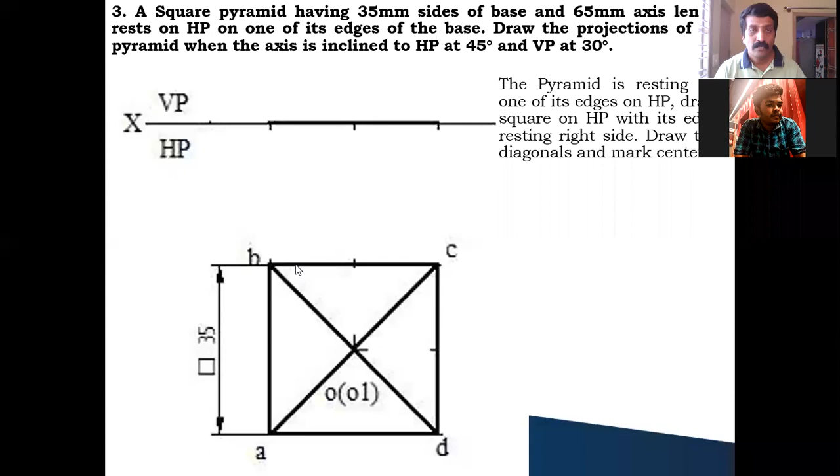Next, coming to the front view, you draw the vertical projectors from all the points like this. Already we have done this in the first example. Draw the vertical projectors, and from the center you take 65 millimeter. This is the axis of your square pyramid. Mark it on that. You call that O dash.

From here you draw a line to the end points, and you are looking from the front side. A and D points you can see, you cannot see B and C. That's why B dash and C dash should be written within brackets. And O1 point is the base point. Even in the front view or top view, you cannot see that. So it is written within brackets. So this completes your true shape diagram, that is front view and top view.

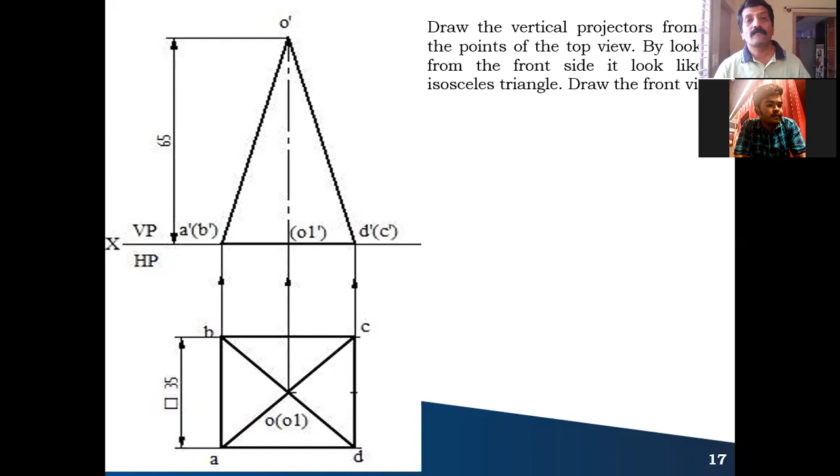Next, coming to the next step, he has given the axis of the pyramid is inclined at 45 degree to HP. In the last class, the same thing we have discussed. The base and the axis of the pyramid are mutually perpendicular to each other. So this is your axis. Axis is making an angle of 45 degree, so since the base and axis are mutually perpendicular, the base also should have 45 degree.

So what I will do, I'll take right side on the XY line A1 point and I'll draw a 45 degree line, that is base inclination, left side like this. After drawing this base inclination, I'll redraw the previous front view such that this isosceles triangle base should exactly rest on this 45 degree line. So without changing its shape and size and all the points, I need to redraw it.

Okay, how to redraw it? First you are taking this D dash and C dash point here. You take the base as your length, that is 35 millimeter. With this as the center, you cut this 45 degree line. And you call the corresponding points A dash and B dash, and take from here to any one center point, and from here you cut it, you will get the O1 point also.

And from this O1, you draw a 90 degree line, or perpendicular line, to this base. On this perpendicular line, you take 65 millimeter as the axis length and cut it here. So you'll get O dash also. After getting all the points, you join it. So you're going to get the isosceles triangle, and the base is inclined at 45 degree.

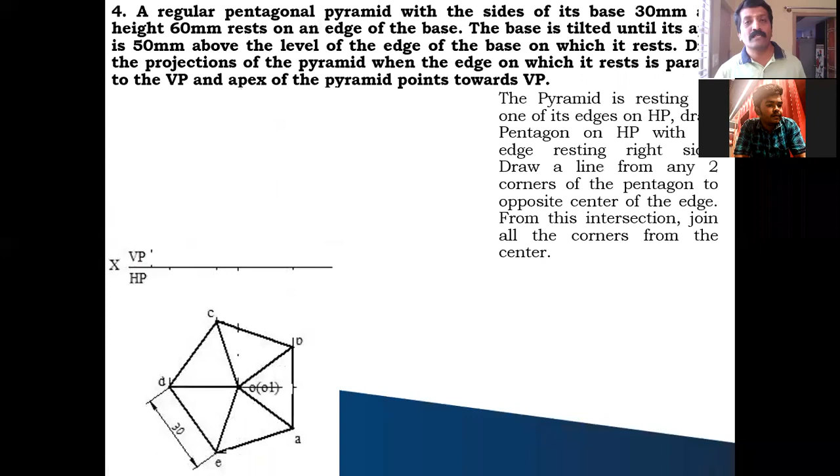Next, what has he given? The question clearly says the base is tilted until its apex is 50 millimeter above the level of the edge of the base. So it is like this. You have taken the edge on your right side. The apex is tilted such that from the base it should be 50 millimeter distance. This distance is 50 millimeter.

So this is the initial position. The apex is tilted in such a way that the perpendicular distance between the apex and the base is 50 millimeter. How do you draw this? Let me explain on the next slide. Observe the cursor. You take 50 millimeter above the xy line and draw one horizontal line. That means your apex point should come on this particular 50 millimeter line.

After that, I will take any one point on the right side here, because it is resting on the base, and I will call this edge A dash B dash. Then I will take the distance from A dash to O dash, with this as the center, and cut this 50 millimeter line. I'll call it O dash, because this is the apex which has to be tilted so that it is 50 millimeter above the base. So I got the A dash B dash point as well as the O dash point.

Now I need to get this point. How to get this? Take the distance from A dash to D dash and cut an arc somewhere here. Similarly, take the O dash to D dash length with the help of your compass. With this as the center, you cut this arc. Wherever these two arcs intersect, from that point you join it to A dash as well as O dash. Then this outer triangle is ready.

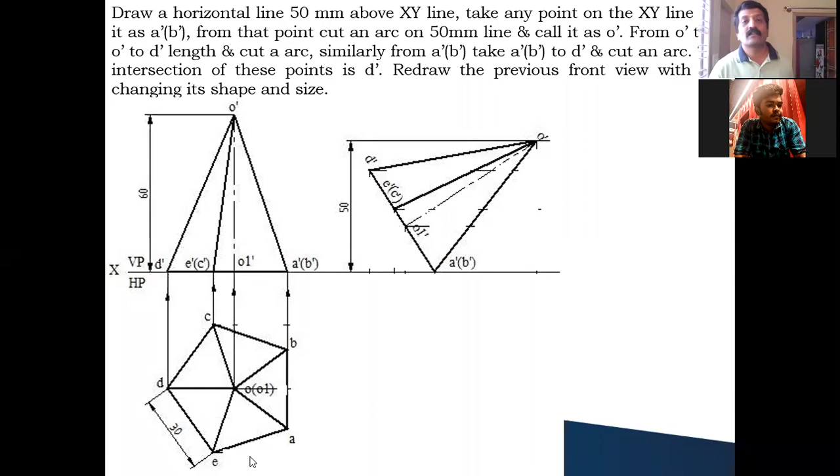After this, the top view, you know how to draw it. Draw vertical projectors from all the points like this, and draw the horizontal projectors also from all the points from the top view. 5 points you're going to get. Coincide the points. A is here, A dash is here, this is A. B is here, B dash is here, this is B.

C is here, C dash is here, this is C. D is here, D dash is here, this is D. E is here, E dash is here, this is E. And base center point O1 is here, O1 dash is here, this is O1. Apex point O is here, O dash is here, this is O. Like this, all the points here.

Now you have to see from the top to draw the hidden as well as the visible edges. You are looking from here. If you are looking from here, the nearest base edges are D to C and D to E. You can see D to C and D to E. So definitely the A to B edge which is resting on HP I cannot see. So A to B, as well as A to E, as well as B to C, you cannot see.

It is exactly like this. You have tilted it like this, correct? So you are looking from here. You are looking from here means only these two base edges I can see. The remaining three edges I cannot see. That's why I made them hidden edges.

And coming to the slant edges, after completion of the base edges, all the corners of the base should be joined to the vertex or the apex. You are looking from the top. D to O you can see, so I can draw it as a continuous line. E to O and C to O also we can see; they become outermost boundary edges.

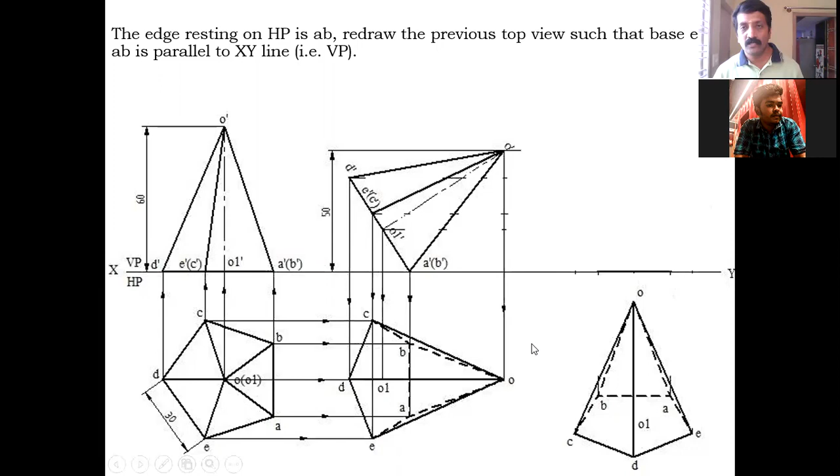Okay. Apex point O is also here. Now we need to join all the corners to the apex. Without changing the hidden edges and visible edges, you need to redraw here. Redrawing completes the final position top view. After this, draw the vertical projectors from all the points of the top view. You'll get points 1, 2, 3, 4, 5, and draw the horizontal projectors also like this.

Okay, coincide the points. A is here, A dash is here, this is A. B is here, B dash is here, this is B. C is here, C dash is here, this is C. D is here, D dash is here, this is D. E is here, E dash is here, this is E. O1 is here, O1 dash is here, this is O1 dash. O is here, O dash is here, this is O dash. So all the points are marked, and now you are looking from here to get the front view.

Because the base is towards you, you can see the complete base. So the base A, B, C, D, E you can mark as visible edges: A dash, B dash, C dash, and E dash. After that, coming to the slant edges. You are looking from here for the front view, so just observe. D to O is very near to you, a visible edge. C to O as well as E to O you can also see; they become the outermost boundary lines.

Can you see B to O and A to O? We cannot see them, so these two are hidden edges. It is like this: the first position. I have tilted it like this for the second position. Now I made it parallel like this; the base is parallel to XY. Now the complete base you can see. Slant edges 1, 2, 3 you can see. You cannot see these two slant edges. That is what I have shown here. This completes the orthographic projection of the pentagon pyramid in this particular case.

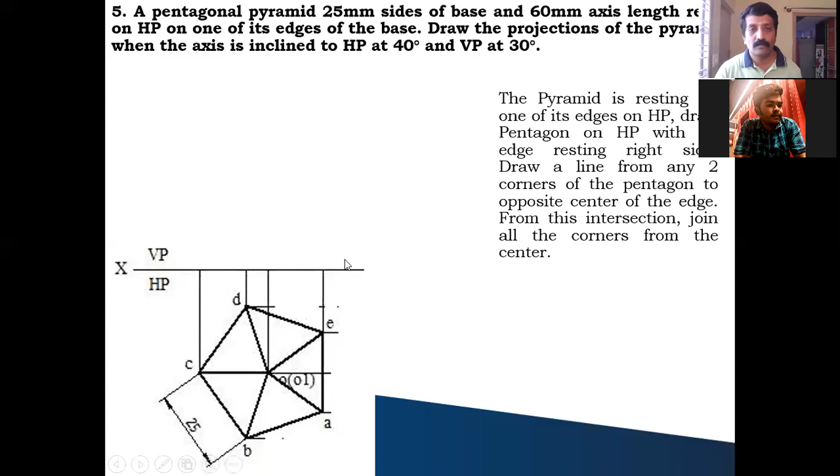Then to draw the front view, draw the vertical projectors like this from all the points, and then from this axis point, this is the axis line, correct? Draw a line equal to 60 millimeters. Cut 60 millimeters; that is your apex. Once you get the apex, join from the apex to all the corners.

That's all the points. You are looking from here: A, B, C. You cannot see D and E. That is why D dash and E dash are put within the bracket. So you can complete this front view and top view very easily.

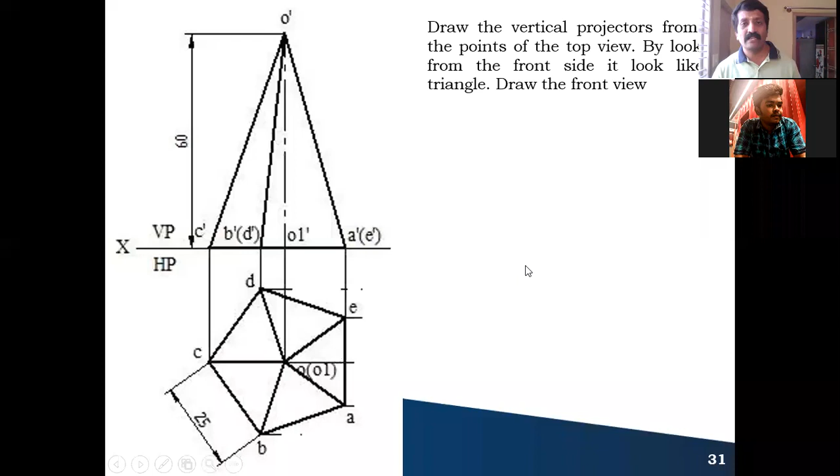Now the second position: the axis is inclined at 40 degrees with respect to HP. So the axis is 40 degree. How much is the base? Since axis and base are mutually perpendicular, if the axis is 40, the base is 90 minus 40, which is 50 degrees. So what should I do?

I'll take any one point on the right side of the XY line and draw a 50-degree line on the left side like this. Now I should redraw the previous front view such that the base of this triangle exactly coincides with this 50-degree base inclination line. How do I redraw this?

This point I have taken as A dash and E dash. I'll take this distance A dash to C dash as the center and cut this 50-degree line to get C dash. Similarly, take this distance, cut it here, transfer the point, and take the O1 distance also from this point and cut it here. You transfer all the points without changing anything.

After that, from the axis line, draw a perpendicular 90-degree line to this base. This perpendicular line, the axis height, is 60 millimeter. Take 60 millimeter and cut it to get the apex point O dash. Now join all the points so, without changing the shape and size, you redraw everything here. So this completes your front view.

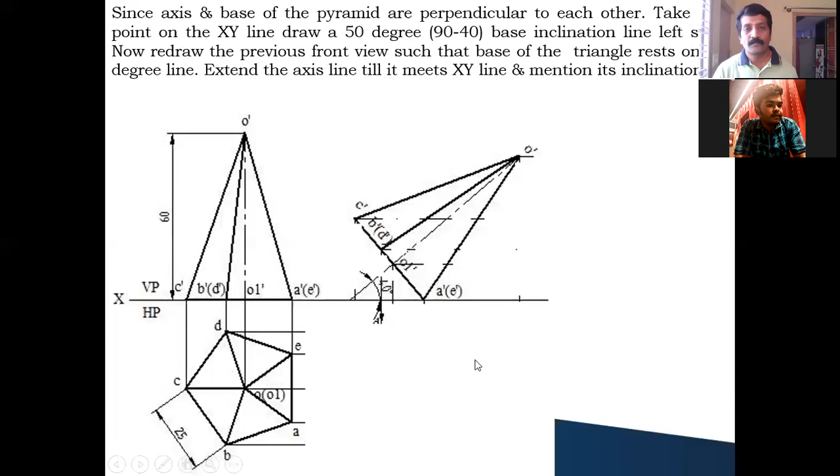So after this, the top view is very easy. Just draw the vertical projectors from all the points and horizontal projectors from the previous top view, then coincide the points.

A is here, A dash is here, this is A. B is here, B dash is here, this is B. C is here, C dash is here, this is C. D is here, D dash is here, this is D. E is here, E dash is here, this is E. The base axis point O1 is here and O1 dash is here, this is O1. The apex point O is here and O dash is here, this is O. So now we have got all the complete points.

Now we are looking from the top: C to B and C to D you can see, that's why this becomes the outermost boundary line, drawn as a visible edge. Here A to E, which is resting on HP, you are looking from the top side, so you cannot see that; A to E is a hidden edge. Similarly, A to B as well as D to E also you cannot see.

It is exactly similar to the previous case. You have tilted it like this, correct? The base edges, only 1 and 2, these two base edges you can see. You cannot see the base edge which is resting, and the other two base edges you cannot see. So the three base edges are hidden edges.

Now coming to the slant edges, C to O: you are looking from here, so you can see C to O. B to O and D to O also you can see, so they become the outermost boundary line. A to O and E to O you cannot see because they are behind, so E to O and A to O slant edges are also hidden edges. The axis line points I have mentioned here I cannot represent separately since a visible edge is already there. So this completes your top view.

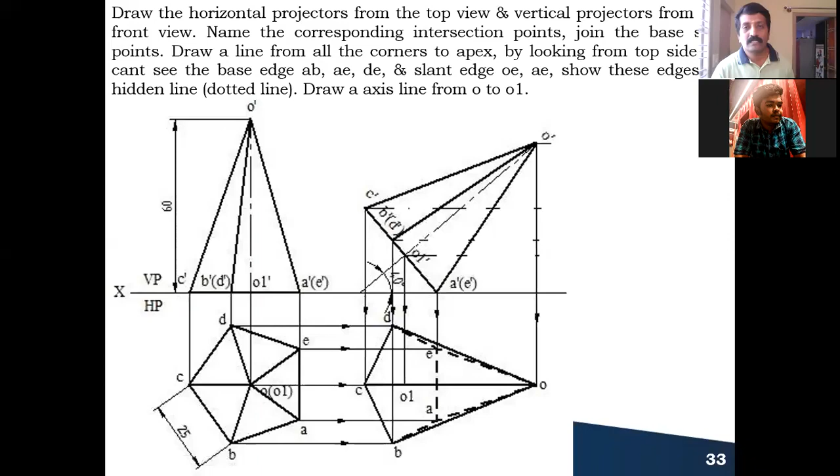Next, coming to the next position: the axis is given inclined at 30 degrees to VP, and this inclination is the true inclination. If the true inclination is given, we first have to take the true length of the axis, and we need to find out the apparent inclination of the axis. We have done this for 3 examples already.

Take any one point on the XY line—if the space is not sufficient in your sheet or sketchbook, below that draw a horizontal line. From there, take a 30-degree line. On that 30-degree line, first take the apex point O. Now take the true length of the axis.

The true length is the actual length of the axis, that is 60 millimeters. With O as the center, cut this true length of the axis. After getting the true length, wherever it cuts, draw the locus line, that is a horizontal line, which is the locus of the true length.

After drawing the locus line, take the apparent length of the axis O to O1 from the previous top view. Take this length with the same center O, and cut the horizontal locus line. Call that point O1, and join it. O and O1 is ready.

Once you get O and O1, you have to redraw the top view such that this O1 and O should exactly coincide with this point. So how to redraw this? So many cases we have discussed. So O and O1 you have here, correct?

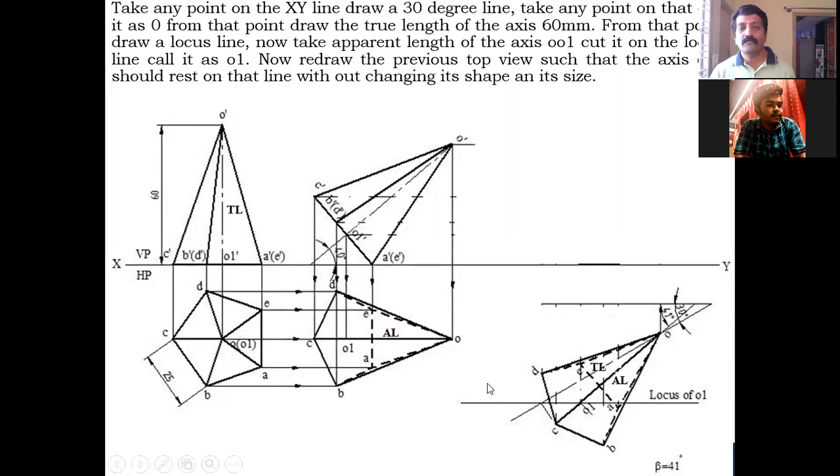How to draw this? Draw the vertical projectors from all the points of your top view, and draw the horizontal projectors from all the points of your front view like this. After this, coincide the points.

Where is A? A is here, A dash is here. B is here, B dash is here. C is here, C dash is here. D is here, D dash is here. E is here, E dash is here.

O1 is here, O1 dash is here. Apex point O is here, O dash is here. All the points you are getting, since I'm tilting the apex towards the XY line and the base towards you, the complete base you can see in all the cases.

This is true. So looking from here, the complete base you can see: A, B, C, D, E, and A dash, B dash, C dash, D dash, E dash. You can make it a visible edge. The base is completely visible.

Coming to the slant edges: we are looking from here, so B to O you can see, draw it as a thick visible edge line. C to O you can also see, the outermost boundary line. A to O also you can see, it becomes the outermost boundary line, so I cannot draw a dotted line here.

So which two edges can I not see? Looking from here, D to O I cannot see, and E to O I cannot see. That's why D to O as well as E to O are hidden edges.

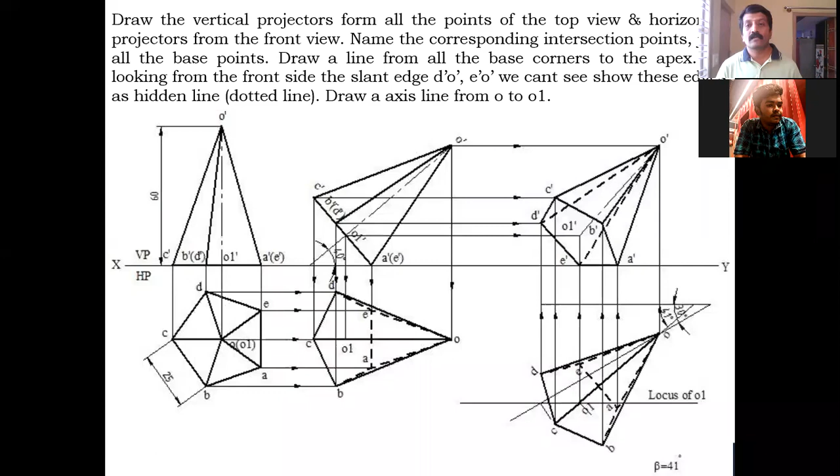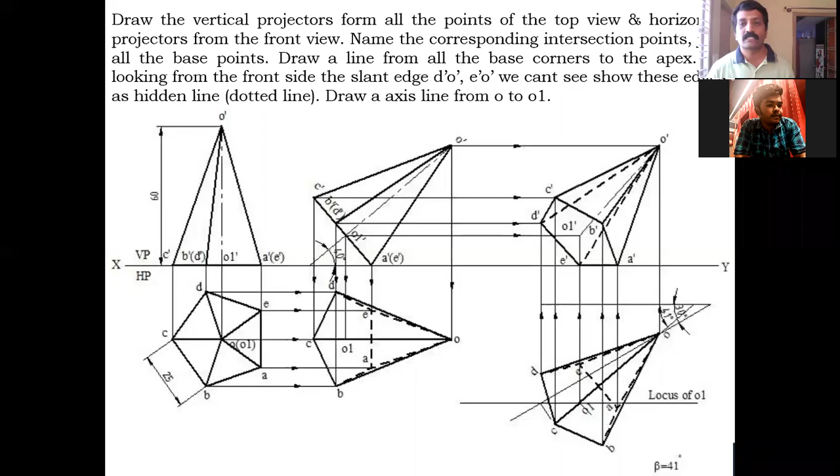Today we discussed 3 examples and completed this. On Monday, 3 or 4 more examples will be worked out, including hexagon, one more pentagon example, and 2 or 3 examples in hexagon pyramid. Then afterwards some special cases in pyramids, and after that we'll move to the prism.